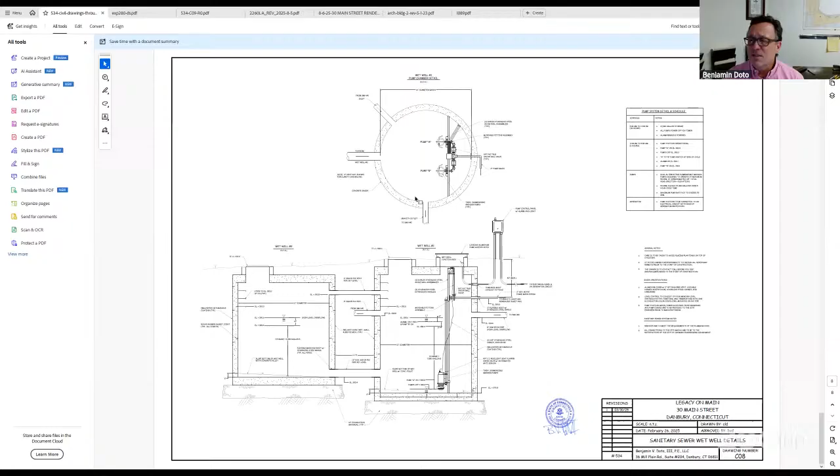The only thing we'll need to do is when we submit for building permits, we'll have to get into a little more detail with respect to the specifications and operation of these items. So that's basically how we address the sewer. There were a few other impacts to the site strictly related to the zoning change regulations, but I'm not going to go over the details here on the zoning table. Well, there's one more thing.

Sorry about that. We do have a water main extension that we're bringing onto the site. As I mentioned, the front building is already served by water and sprinkler - we're bringing that onto the site. The fire marshal had asked us during a pre-app two years ago to put a fire hydrant on the site, which is going to be in this same shared island. Kelly had also asked that the landscape plan be revised to make sure we don't have any plantings on top of the easement in that area, and the landscape plan has been revised to accommodate this.

The other thing with respect to water is we've requested some hydrant flow tests. Standard conditions, if this project is approved, there will be a city main coming into the site. That's one of Kelly's comments, that city council approval will need to be made for that water extension.

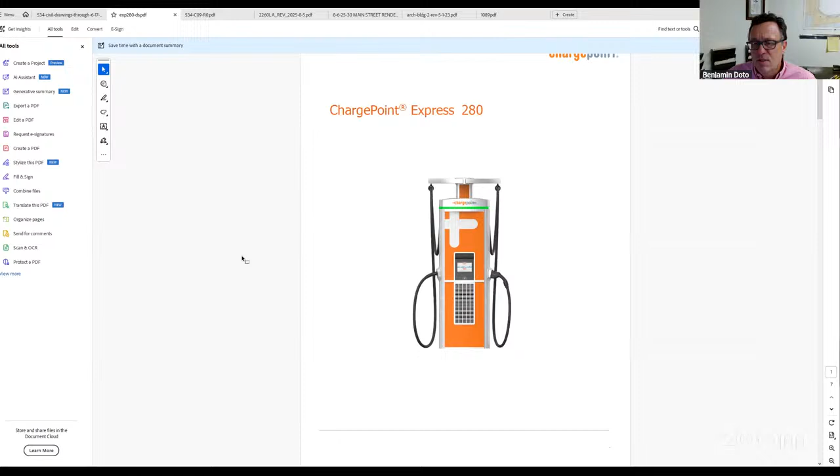Ally had asked, and we'll add this detail to the plan, what it's going to look like. We don't have a specific brand yet, but it's most likely - I was talking to our architect, they've been using these on some sites, and they look like any charging station. Basically, they look like the vacuum cleaners when you go to a self-serve car wash with smaller hoses. But this is basically what they look like.

Each one of these, just to get a sense, is about 6 or 7 feet tall, 2 feet wide, and maybe 1.5 feet deep. They're pretty narrow, and so one of these constitutes 2 EV charging spaces because you put them between the spaces at the end of the spaces, and that's what the cables are for. We do anticipate using the same ones inside the garage and outside the garage.

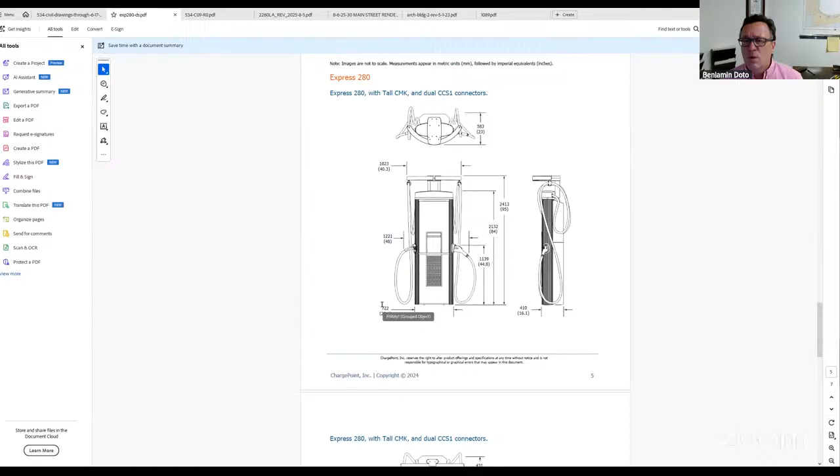If for some reason that changes and we use a different one, we'll let the city know as well with respect to that. As far as the rest of Ally's comments, some of hers have to do with adding street addresses and tax assessor numbers to the plans. I'll add that detail to the site plan and the detail sheets. The sight distances are being added to the landscape plan, like I just mentioned.

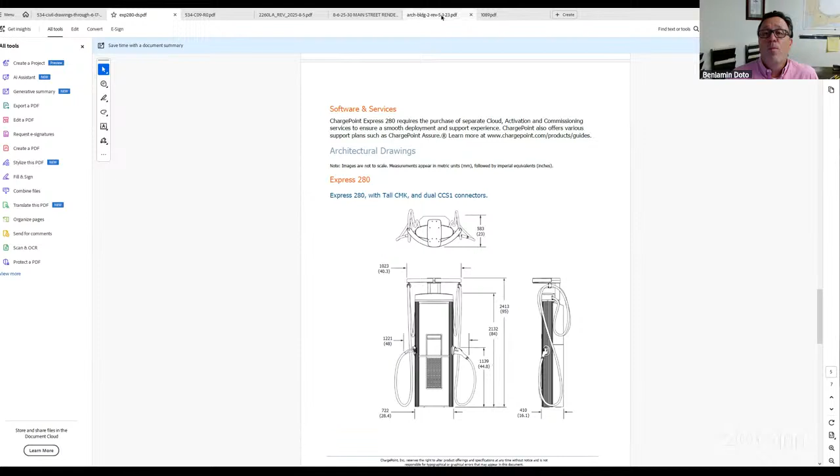Architectural. I'm going to just touch on these. So these do still need to be labeled, but I just want to show you what our architect Claris had prepared, just to give a sense of the building.

One of Ally's comments that I just realized is that she wanted the directional orientation shown, but I just want to show these on behalf of our architect, to get a sense. This is looking from the east, and Main Street doesn't point north — it sort of points to the northwest here. So this is looking from Main Street along the east direction.

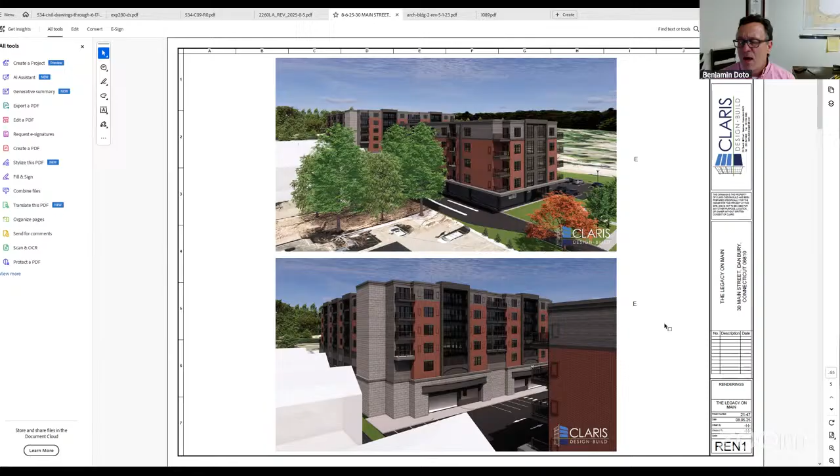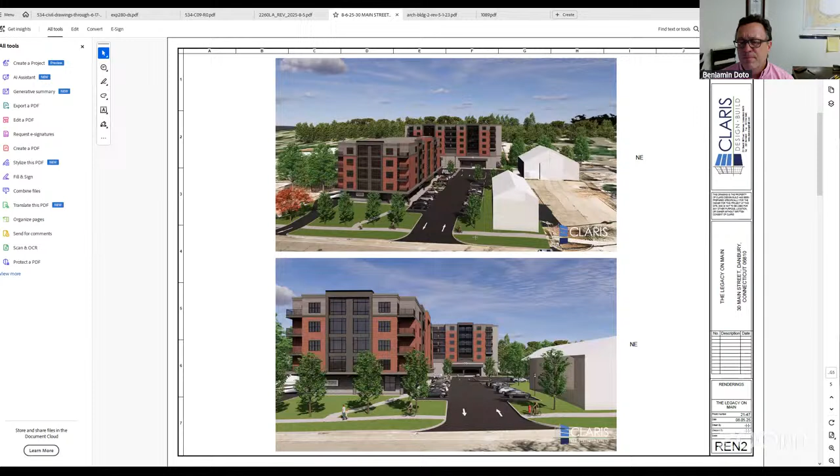The next one below is at the Enclave, the townhome project just to our south, looking from their site at the rear building. You've seen these pictures before, but I want to highlight them again. Both of these are looking from the northeast along Main Street, as to what you have there.

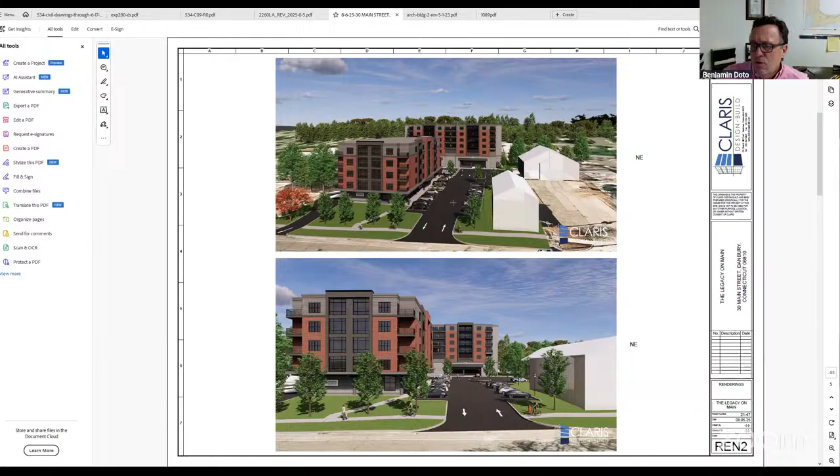One of the biggest features we have with the site is the improved driveway access. For those familiar with the site, this is what we have now — it's really an awkward site where you come in the driveway and have to make a right and a left turn, partially driving under the building to get around. By removing and tearing down number 34, we're able to move the driveway over here. That's going to be a 30-foot wide drive aisle, more than the city minimum, which makes it very comfortable. Our drive aisle behind the building is 37 feet, so all the circulation here is a significant improvement over what we have.

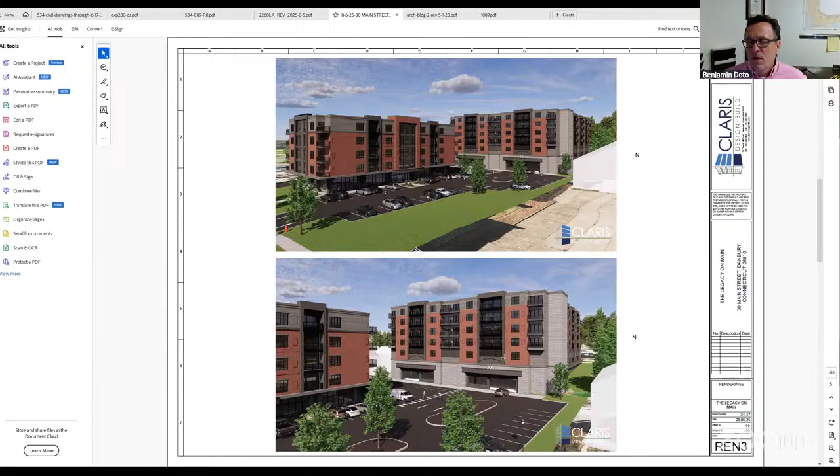These are just a couple more views. This is from the north, basically looking toward the site from the road and the midpoint. This is entering the site near the entrance, looking at the rear building with the existing building to your left. This bottom one is looking from the northwest at the side of the rear building. This one is looking into the horseshoe of the big building in the back from the southwest. And the last image is looking from the south, from the back of the Enclave towards the rear building.

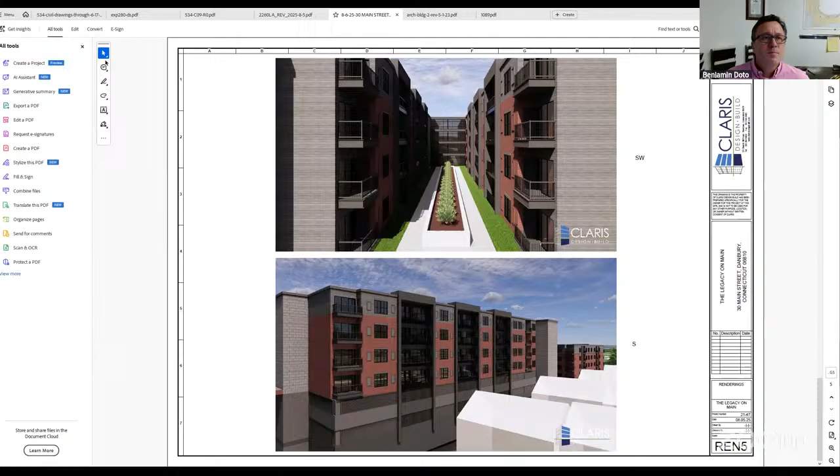I think I've touched on everything. We'll get those landscape plans labeled to show the directional signs better. The landscape plan, as I mentioned, needs to dimension the sight distance, but as I said, all the views are behind the lines of sight. As Tom said, none of these comments impact anything physical with respect to the building locations, building sizes, or on-site utilities. I think we had almost reached that point last time before we had to go back and relook at the sewer. I'll be happy to answer any questions anyone may have.

Ben, can you show us where the sewage holding system, where those tanks are going to be? Sure, let me do that. So that was you, right Bob? Yes. Okay, so when you come into the site, you've got the main driveway aisle, and then we have this large island that has always been there. We're going to put both of those tanks in the lawn area there. I'm going to switch to my grading and utility plan.

If you could see these two circles — one right here and the other right here. The main tank that has the pumps in it will have a manhole lid for access, and it'll also have a hatch to service the pumps. The other tank will simply be an overflow tank that's just pure storage. But you won't see those tanks from the ground — you'll just see the manhole lid, with grass on top of it.

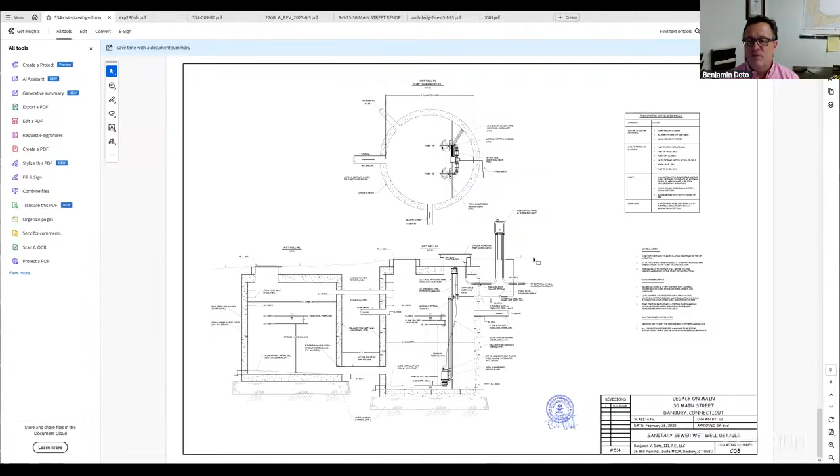And they will be just on the Main Street side of the proposed fire hydrant, but they will be contained to that island. And in profile, this is a feature, a cross section through the tanks.

But just to get a sense, we have sewage flowing into the large tank. Large tank fills up, overflows into the smaller tank. But this actually has a very nice feature, and we were able to do it on this site.

We have a gravity line leaving the site, so for some reason, if both pumps stop working and the generator doesn't work, sewage will have the ability to flow off. This was one of the things we were able to work out with engineering. And who knows, someday, if the city ever has extra capacity downtown and we don't need these pumps, we can...

simply bridge the gap with those pipes, fill the tanks with sand, and remove the pumps and not need them. So it's set up that the tanks are there until the sewage capacity issues downtown don't exist. It was really set up so this can be gravity fed someday.

Great, thank you. You're welcome.

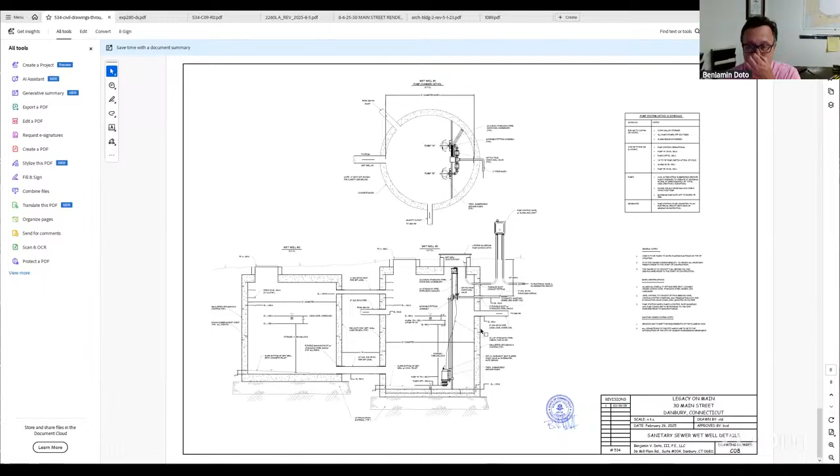And here, Bob, this will show you too. You can see this tank. The only thing you're going to see from the ground is a manhole cover, and this is a hatch for access to the pumps if you have to service them. Got it, thank you.

Commission members, any questions? Let me see here. Kevin, you're all right? No, I'm good. Okay. Ellen, you're good? Okay. All right. No questions, so I think we're good to move along here.

I'll just see if anybody else wants to speak in favor of this application. I'm not quite finished yet, Mr. Vice Chairman. Oh, okay, sorry about that. Thank you. Yeah, and Tom, if I forgot something, let me know.

Yeah, will do. Thanks, Ben. We believe, and hope you as a commission do too, that the Legacy on Main will be a beneficial addition to the redevelopment of downtown Danbury.

These apartments in these buildings will be rental units. This project is consistent with the Plan of Conservation and Development, which actually focuses on the redevelopment of downtown Danbury and further focuses on offering new apartment opportunities. It's also consistent with certain goals set forth in the Danbury Affordable Housing Plan, and the POCD actually incorporates that housing plan into the POCD.

And while these properties are not specifically within the very four corners of the downtown TOD study area that was done, it is now in the DTOD zone, and this particular project is consistent with the goals set forth in the DTOD study.

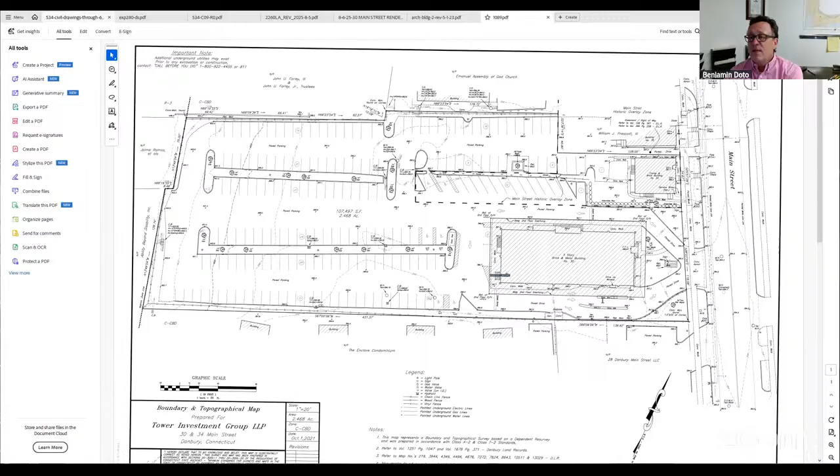So for residents on site, or even visitors to the bank, if they want to get out and take a right without getting caught behind someone taking a left turn, they can go out on the southerly entrance and take that right turn unfettered, because we are keeping that. I'm going to share it briefly again, since I didn't mention this - this is the new main driveway here. As I mentioned, it's a 30-foot wide driveway, but we have one egress lane.

The bank's 2 drive-through lanes and the bank bypass lane are going to stay, but converted to a right turn egress only. We're hoping a lot of the traffic on site, including people parked in the parking garage heading south, will take that right turn out of the site, but they'll still be able to do the same with the main driveway.

As far as the DOT is concerned, and Tom mentioned this at the beginning of the meeting, we have to go to OSTA, formerly the State Traffic Commission, as part of this. So if this project is approved by the city, the next step will be going in front of them due to the size, since we meet the minimum thresholds for building size and parking.

Some of the questions you raised may come up there. I'm pretty sure this road is not wide enough for 4 lanes. As you mentioned, there are white stripes on the shoulder of the road to accommodate people taking a left turn and getting around. But as Tom said, we don't plan on turning this into 4 lanes, though we do anticipate going through a review process with OSTA.

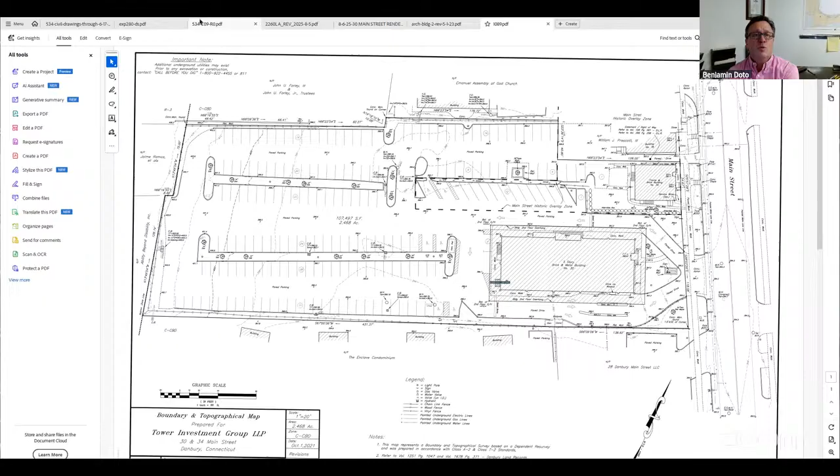As far as the oil water separator, the existing site has approximately 200 surface parking spaces, and all of that drainage goes into the drainage system untreated. The new site will reduce our surface parking from approximately 200 to 53, and that's going to include a little over 20% of the parking being pervious parking. We don't meet the thresholds for needing a water quality unit outside because we're actually reducing our pavement.

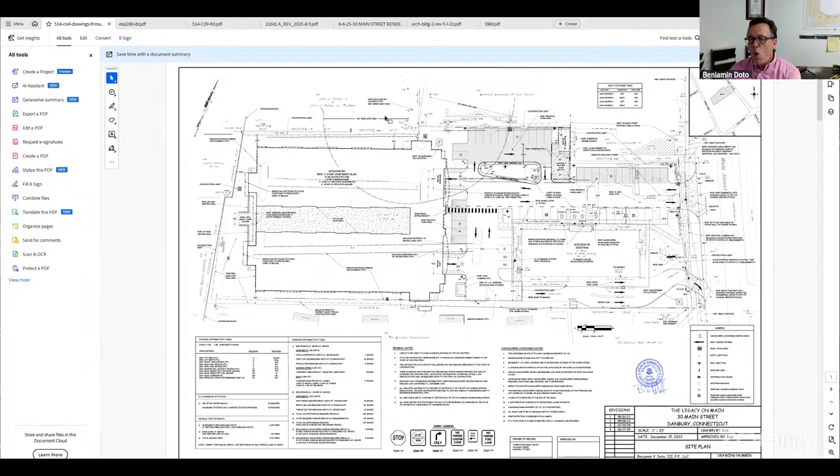But the 250 parking spaces in the parking garage—any liquids from there, meaning snow melt, rain melt, washing the garage floor, or potential leaks—will actually go to an oil water separator. I'll show you on the plan here: we have an oil water separator right here, underground, it's a tank, and it overflows into the sanitary sewer. Like any modern parking garage, that's a requirement, that it be put in and not tied to the storm sewer.

So the only drainage that will go into the storm sewer system is the roof drainage, which is generally considered clean. We have an extensive detention system, so the end result is going to be positive from a water quality standpoint.

As far as the EV charging stations in the garage, I'll talk to the architect about your concerns regarding fires, but the parking garage is going to be reinforced concrete, 3 levels, walls, floor, etc. The risk here compared to any other garage is no different. The only difference is the building above it will be sprinklered. I don't know about the garage yet, Councilman Perkins—I'll talk to our architect about that question.

It's a double-edged sword here. The city zoning requirements require that we have a minimum amount of EV charging stations for this site. We looked at options and felt the garage would be the best place for them, because we didn't want the outdoor ones blocked by bank customers coming and going or other visitors. So we positioned them in the garage in a spot where people could park overnight or for an afternoon and charge their cars. So will we be reducing the amount?

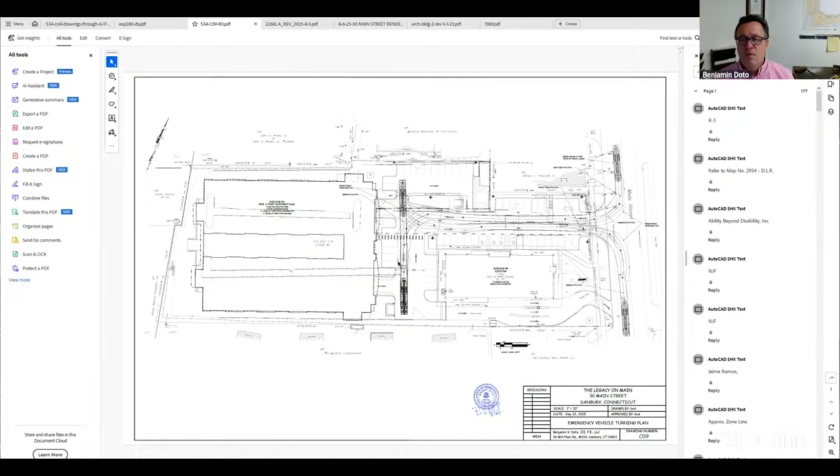The fire marshal, Councilman Perkins, did ask us, two years ago, that we put the hydrant on the site, which we've done here. More recently, and this was part of the record, they asked us to show being able to get their big ladder truck to drive in, back in, turn around, and leave the site. He asked this before he issued his letter about being comfortable accessing the site with the emergency vehicle. The other thing is, this lane is 30 feet wide here.

The city minimum is 24, and this rear lane is 37. So we really did not skimp or cramp this up too much. We tried to leave things as open as possible, not just for daily use, but also for emergency vehicles. Currently, an emergency vehicle, when it enters the site, has to enter on the one-way in, turn around on the site, and then exit on the same one-way in, because it doesn't fit through the drive-through lane. Ambulances and police cars do fit, but the big ladder truck just does not fit through the drive-through lane.

I think that's everything for now, other than what Joe can get back to you on. And Ben, the other item was the perimeter fencing.

Oh yes, I'm sorry. Yes, there is perimeter fencing. I'm going to show you here. We're calling for the perimeter fencing to remain, and in some areas over in the back and along the south, we're asking that it be moved closer to the property line where it wanders. The intent wasn't to put any fancy fencing, but the perimeter fencing will stay. Whether it gets moved or replaced is a matter of whether it breaks when they relocate it, but yes, it will be perimeter fenced like it is today, except up in this area along our neighbor to the north, where there's really no need for it.

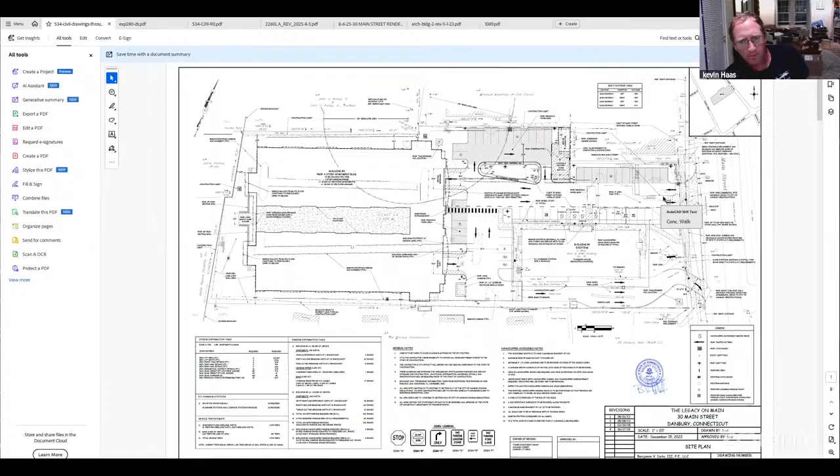Kevin, the way the regs read, it could be pervious, permeable, or porous. It gives you a menu of what to use, so I'm proposing to use pervious. When you're saying pervious asphalt, I've seen pervious concrete - basically the bricks are almost epoxied, so water flows through and there's no fines in there, if that makes sense. It looks like a Rice Krispie treat made out of concrete. So I envision this being more bricks or possibly a honeycomb, but I don't really want to put gravel here downtown from a maintenance standpoint. We have some flexibility though in what we ultimately use.

Okay, and again, you're going to start seeing this on every development in this zone because it's a requirement, not just an option. We see it on every house we do in Greenwich - they make you. Just out of curiosity, what do you see them using most there? They've been using that asphalt that the water somehow goes through. I'll look into it. I know what you're talking about. I'm a little worried about it with heavy vehicles, that's all.

Great, thank you Ben. Okay commission members, any other comments before we continue? As we said before, we're going to need to continue this to the next meeting, talk a little more about traffic, I guess see what Vera has to say, as well as the applicant's traffic expert. Unless there's any other questions or comments, I'd entertain a motion to continue this.

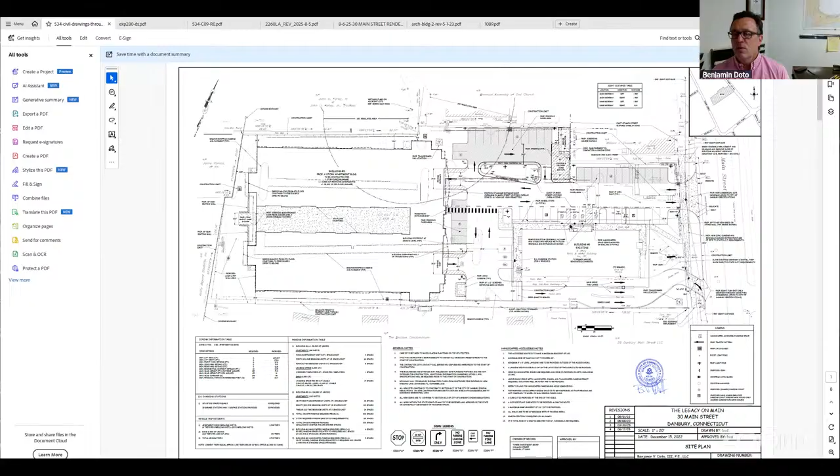So to get a sense right now, the driveway grade - for those of you familiar with the building right now, it was retrofitted to make it handicap accessible, so there's stairs coming into the main lobby and a ramp right here. What we did is we tried to eliminate that and we're raising the grade a little bit here, bringing all the parking in this area flush, the handicap parking flush with the main entrance. So we do have a grade increase, but just to get a sense of what it is, it's not that bad.

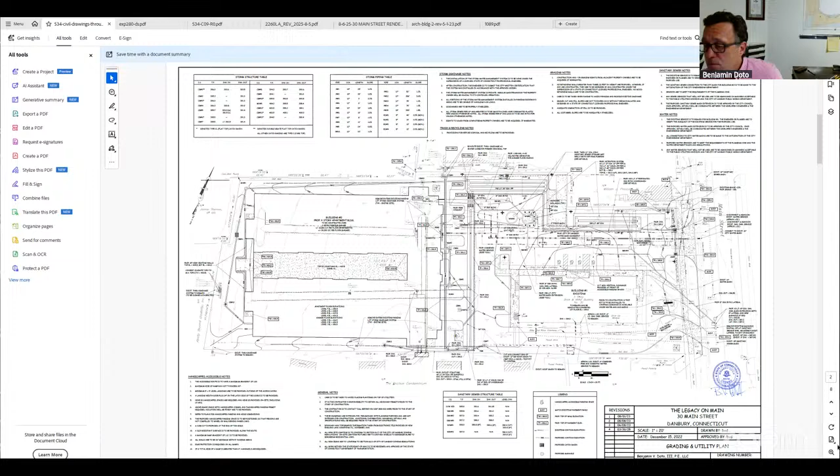Let me zoom in on this portion for you, Kevin. Sorry, bear with me. It looks steeper than it is because I'm showing this with 1 foot contours, but we have a 6% maximum driveway grade here coming in, and that's even from the sidewalk out to the street. The sidewalk itself, between where the snow shelf is, that's relatively flat there, meeting the DOT requirements for the apron. It's basically relatively flat from the gutter to the back of the sidewalk, and then it comes up at 6%.

And what that does is it gets us flush by the time you get to the handicap spaces in front with the entrance, where they currently have about 4 steps into the building. Again, these are 1 foot contours, so it looks to the eye a lot steeper than it actually is.

Thanks, Ben. You're welcome. And just to touch on another point, we are lowering the sidewalk grade across the front of the site a little bit, because as you know, especially as you go north of here, there's a big difference in elevation. Obviously we can't change the sidewalk grade in front of the neighbor's place because they need access to their building, but we are picking it up right around their driveway, improving their driveway a little bit. The neighbor has a 20% driveway grade right now - we're doing the best we can, getting that down to about 18%, making it better for them, and then bringing the sidewalk down.

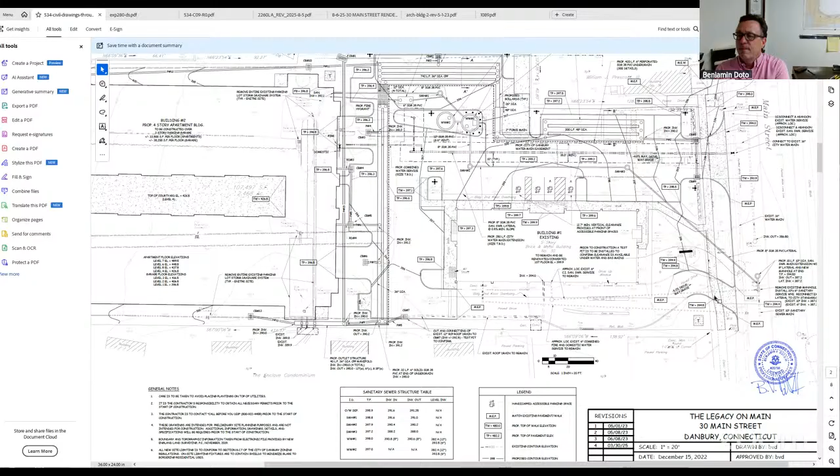And the egress driveway grade will be about 5% on the gas station side. Okay, thank you, Ben. You're welcome.

Commission members, any other comments or questions? Ally, any comments before we move on here? No, I think you guys have covered it all.